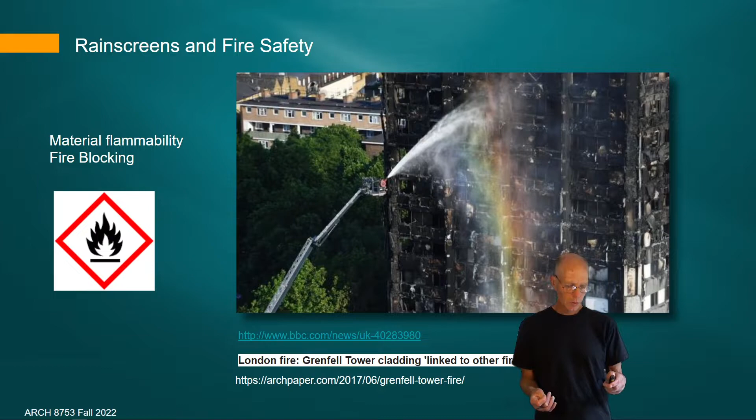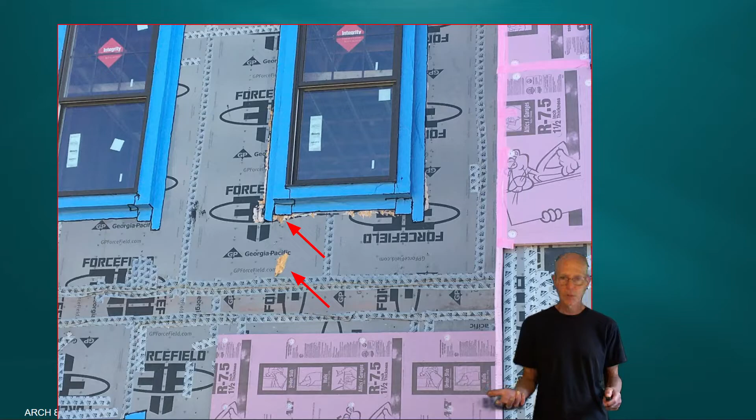And my question is, are the architects of this project engaging facade specialists, or are we allowing the contractor to be doing some of this level of detailing of the wall construction?

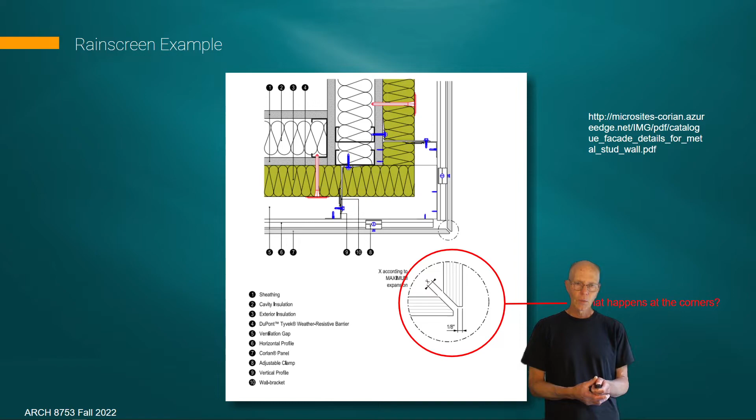And once again, we have that capillary break, but that capillary break is also there because nothing looks worse than two panels that touch next to two panels that don't touch. It starts to look like a crevice has opened up that should normally be closed. So you want to try to maintain that kind of uniform gapping there. And then as this one illustrates, the other reason that we would want to have that is to allow for the thermal expansion and contraction of the components, which quite frankly in a ceramic assembly would be quite minimal.

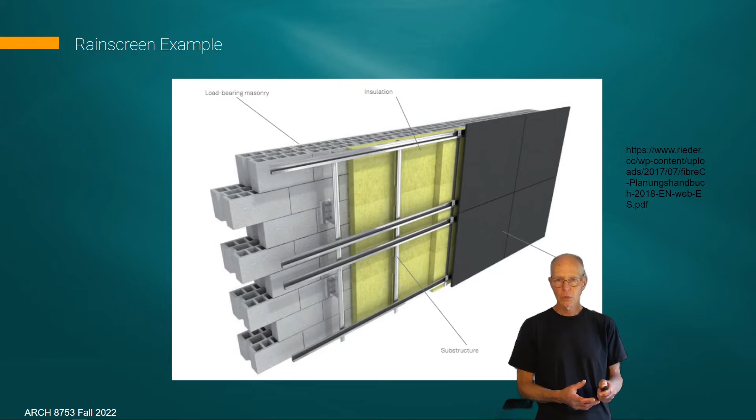So here's another visualization. I think I have this hyperlinked. If you open up the slideshow of the attachment of panels, the exterior insulation, I think you'll notice that we're not seeing clearly delineated in this illustration that moisture barrier, the blue material that would go over the CMU unit, the air and moisture barrier. This is one by a manufacturer, just to show you the varieties of attachment and panel systems.

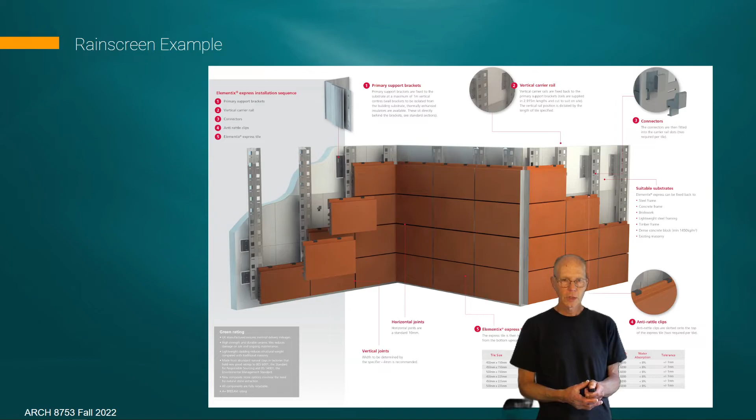You can notice actually some unique corner assembly there. So the outside corner has a re-entrant corner that is framed by an aluminum extrusion. And that's just to disguise the end effect of the panel systems that have open cells on them, and showing the interior details. So it's just a way to deal with that.

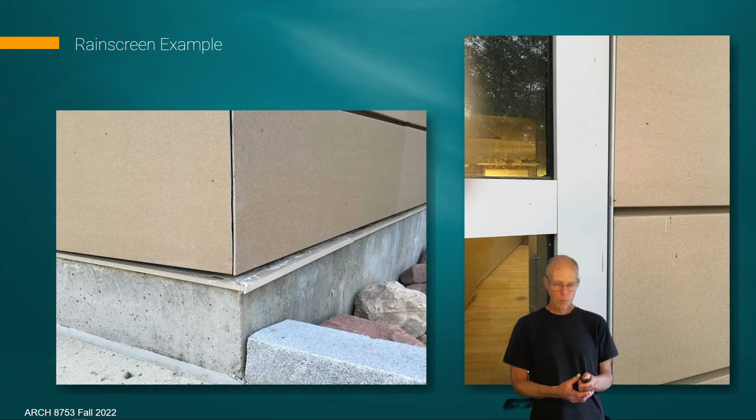And then, let me make sure I'm saying this right, on the right-hand side we have a window detail. We have a little piece of metal trim coming up. Once again, that's disguising or hiding the side profile of the terracotta panel. So once again, that idea of what the corner condition looks like, the one above my head there, you can see how they've got a flattened out surface. It has a little bit of a different kind of texture to it. These are things that would be common and ordinary and expected in the construction, but they might really be a huge surprise to you if you've been detailing these and are not prepared with working with the material.

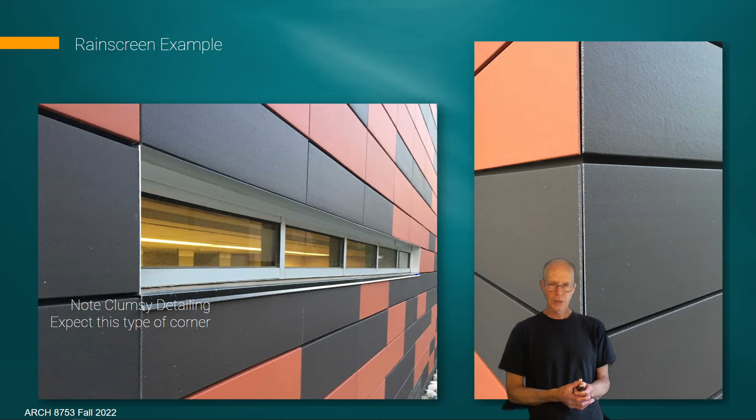I have mixed feelings about this window detail. It matches exactly with the coursing of the tile system, but I think that it is so small that the detailing of it, the returns and flashings, really become a little bit clumsy looking. Another reason to just kind of consider the size and scale of the elements that you put in, and then what their final appearance might be like.

The internet's full of examples of rainscreen design systems, panel systems, and attachment systems. I think that you can review these and you'll find a lot of consistencies between the way panels are attached and the differences in the early stages. Once you've made a plane for the panel, anticipated the use of a clip system and an attachment girt and an air gap and then an insulation layer, changing out systems depending on value engineering and material selection by your client would be easy changes for you to make.

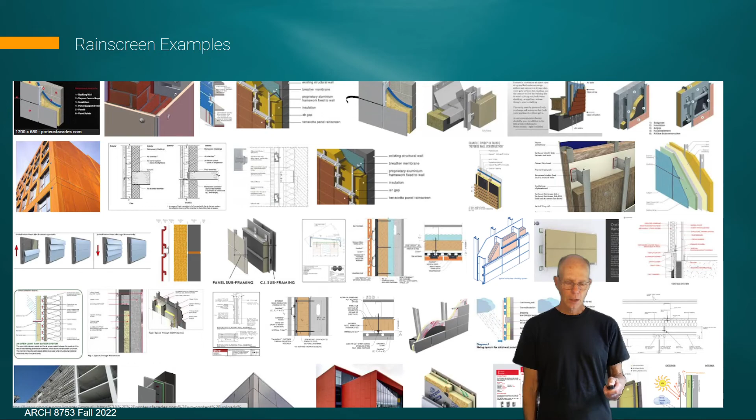This is Boston Valley. This is the kind of detail that Boston Valley provides for clients, architects, in order to detail out their systems. And I've used these in order to create the master panel system that we're going to use in our project. So that pretty well completes the lecture portion of the rainscreen project, and hopefully sets you up to enjoy and gain a lot of knowledge in working through the module of the project that we're going to do this week, or in this module.